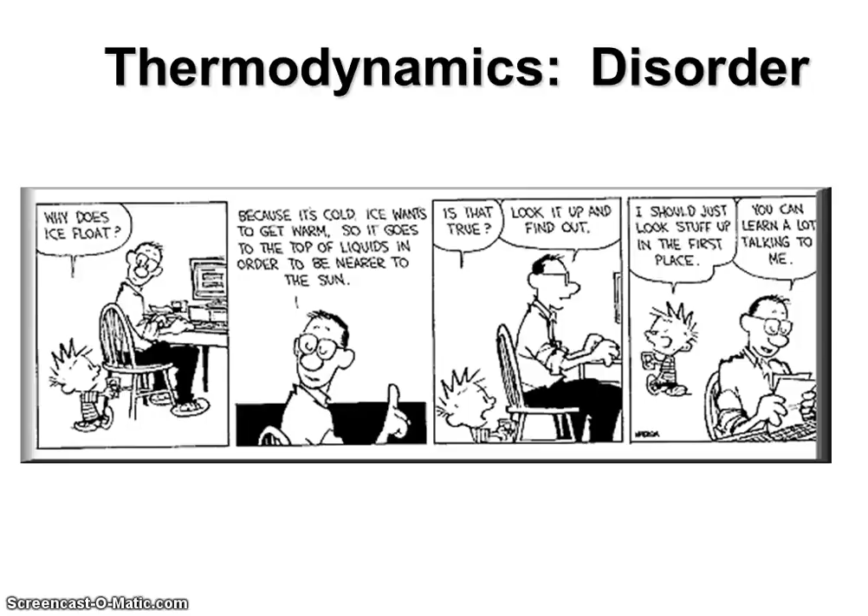Okay, now let's look at the second law of thermodynamics, dealing with entropy. Okay, first of all, I'd like you to make a guess here. Fossil fuel electric generating plants produce thermal pollution. Part of the heat produced by the burning fuel is not converted to electric energy. The reason for this waste is, and you've got five answers here.

A, the efficiency is higher if some heat is allowed to escape. B, engineering technology has not yet reached the point where 100% waste heat recovery is possible. C, some waste heat must be produced; this is a fundamental property of nature when converting heat to useful work. D, the plants rely on fossil fuels, not nuclear fuel, or E, none of the above. So lock in your answer, and let's see if we can figure it out at the end.

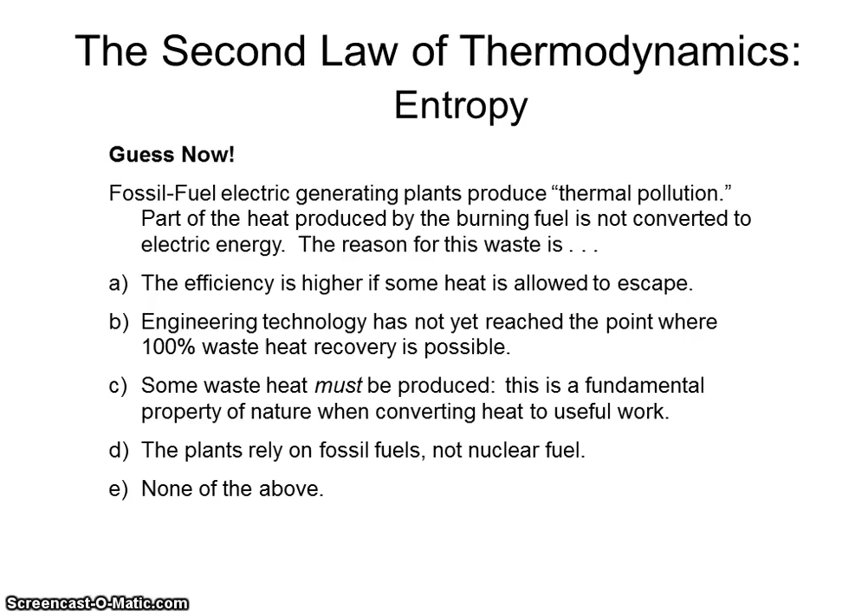Okay, the first law of thermodynamics states that energy is conserved. There are, however, many processes we can imagine that conserve energy, but are not observed to occur in nature. For example, when a hot object touches a cold object, why doesn't the hot object take energy from the cold object, making it hotter and the cold object colder? I mean, that's possible as long as energy is conserved, right? So the one with the low energy gives up even more of its energy to the hotter object, but the total amount of energy would be the same.

That never happens. So here we have this horseshoe that's hot. We put it in the water. What do we do that for? Well, it cools down the horseshoe, right? Well, why? Why doesn't it go in reverse? Why doesn't the hot horseshoe inside this cold bucket of water gain even more energy from the cold water, make the water turn to ice and make the horseshoe even hotter?

Here's another example of that first law. When you drop a mug, its potential energy is converted into kinetic energy, which is then converted into internal energy as the mug shatters and comes to rest on the ground. Have you ever seen it go in reverse? In other words, the shattered mug all of a sudden reassemble itself and go back up into the air to wherever it fell off of. Why not? I mean, the energy is still conserved. Why doesn't it happen?

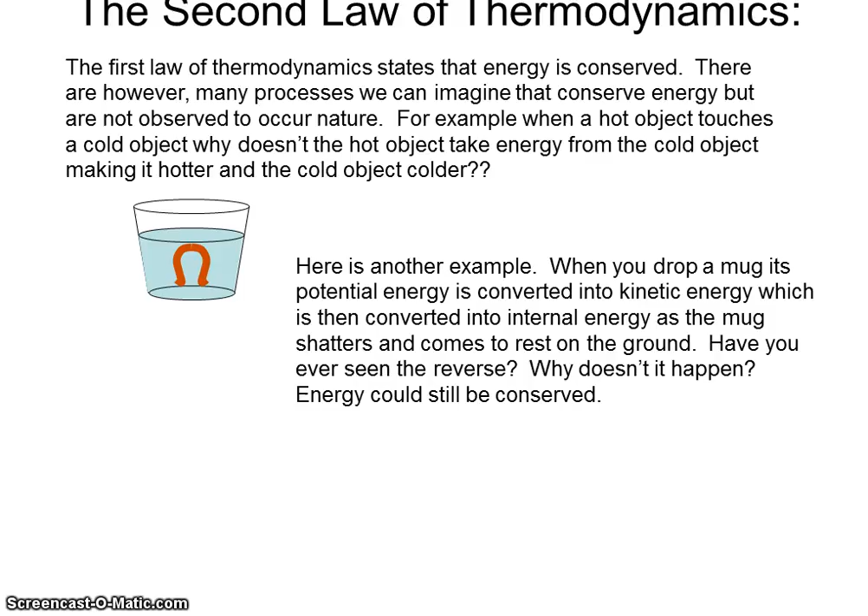Hmm. Well, that's because of the second law of thermodynamics. The second law of thermodynamics is a statement about which processes occur in nature and which do not. Heat can flow spontaneously from a hot object to a cold object. Heat will not flow spontaneously from a cold object to a hot object. Now let's think about a heat engine.

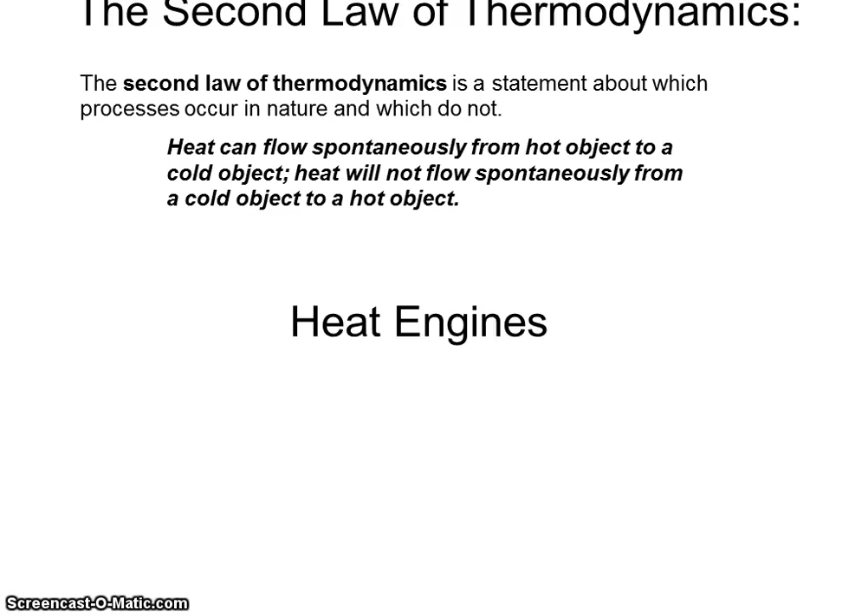This is supposed to be a pictorial example of what a heat engine does. So here we have the engine itself here in green. And what it does is it operates between two reservoirs of temperature. This reservoir here is a high temperature reservoir, and here's a low temperature reservoir. And what it does is it takes energy in the form of heat from the high temperature reservoir and it converts some of that into useful work. But here's the deal, not all of it gets converted into useful work. Some of it is always exhausted out the exhaust into the low temperature reservoir.

So if you're thinking about your car, you've got the high temperature inside your engine, and some of that is turned into useful work to make the tires spin so you could drive somewhere, but some of it goes right out the exhaust or radiates from the radiator into the environment around the car.

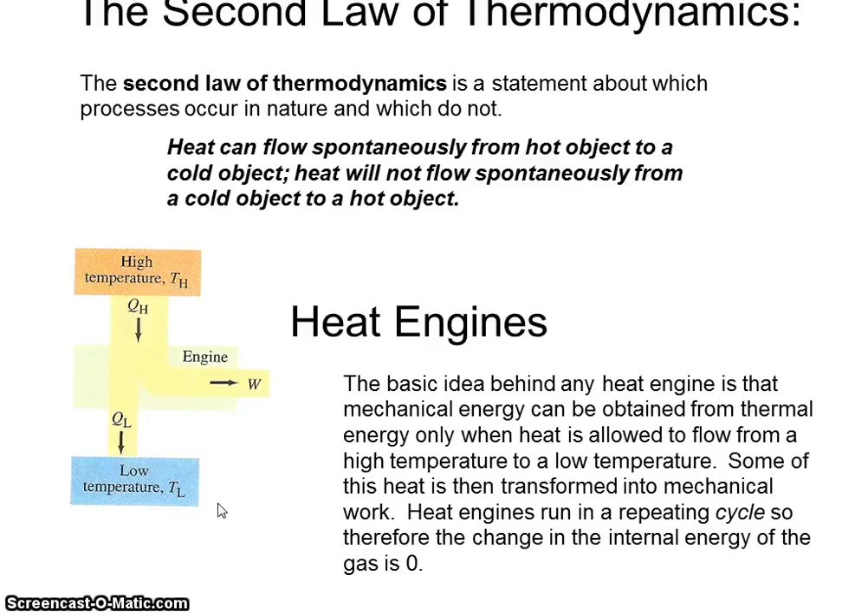The basic idea behind any heat engine is that mechanical energy can be obtained from thermal energy only when heat is allowed to flow from high temperature to low temperature. Some of this heat is then transformed into mechanical work. Heat engines run in a repeating cycle, so therefore the change in internal energy of the gas is zero. Heat engines: why a change in temperature is needed to drive a heat engine.

In the reciprocating steam engine shown below, suppose there were no condenser or pump and that the steam was at the same temperature throughout the system. Thus, although work would be done by the gas on the piston when it expanded, an equal amount of work would have to be done by the piston to force the steam out the exhaust. Well, if that happened, there would be no net work done. For a real engine, the exhaust is cooler, so the exhaust pressure is less than the intake pressure. In that case, there would be net work done.

If I wanted to figure out the efficiency of my engine, really we want to look at the heat that goes in and the heat that goes out and how much useful work. So the efficiency, I'm going to call it E, of any heat engine can be defined as the ratio of the work it does, W, to the heat input at the high temperature, QH. So one way to find the efficiency would be work divided by QH. Now, of course, that's going to be a decimal. Then you can multiply by 100 to figure out that efficiency, percent.

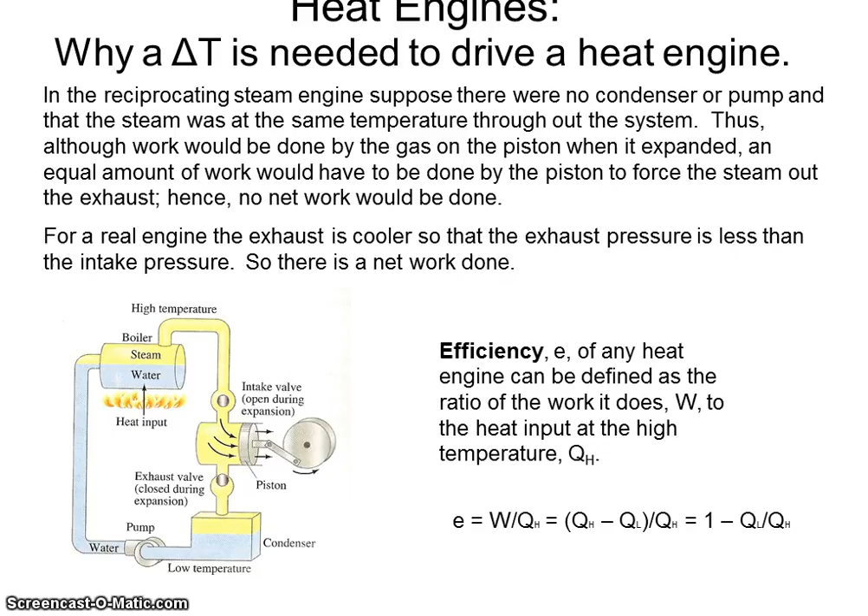Another way to do it, since work is really going to be the leftovers between QH and QL. H again is the high temperature reservoir, QL is the low temperature reservoir, and that's the heat in and heat out. You can think of it that way. Another way you can find it would be QH minus QL, that quantity over QH. Or you could also divide by QH and you get 1 minus QL over QH. Heat engine efficiency can be defined as the ratio of the work it does, W, to the heat input at the high temperature reservoir.

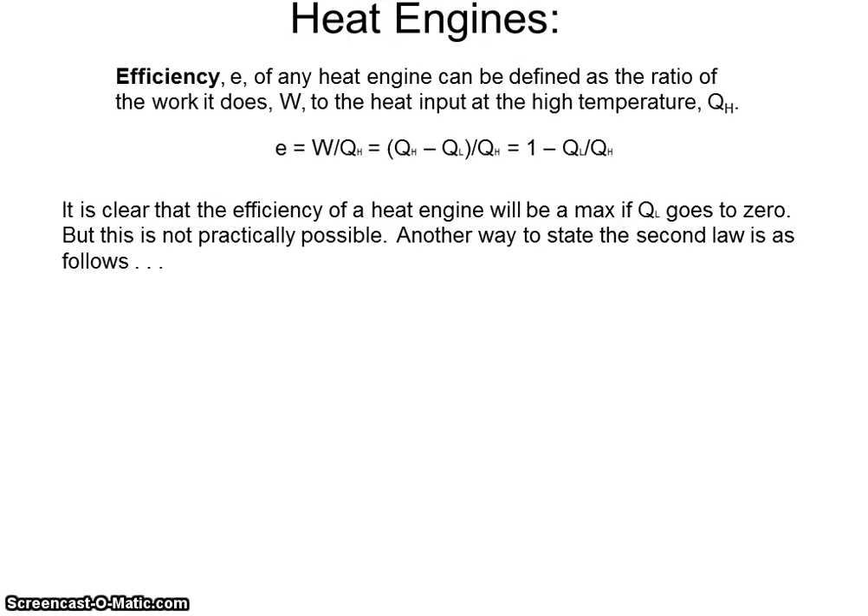It is clear that the efficiency of a heat engine will be a max if QL goes to 0. And I think you can see that. If QL would go to 0, that means you'd have a 100% efficient engine. But that's not practically possible. It can't happen in nature. The second law of thermodynamics says it's not possible. No device is possible whose sole effect is to transform a given amount of heat completely into work.

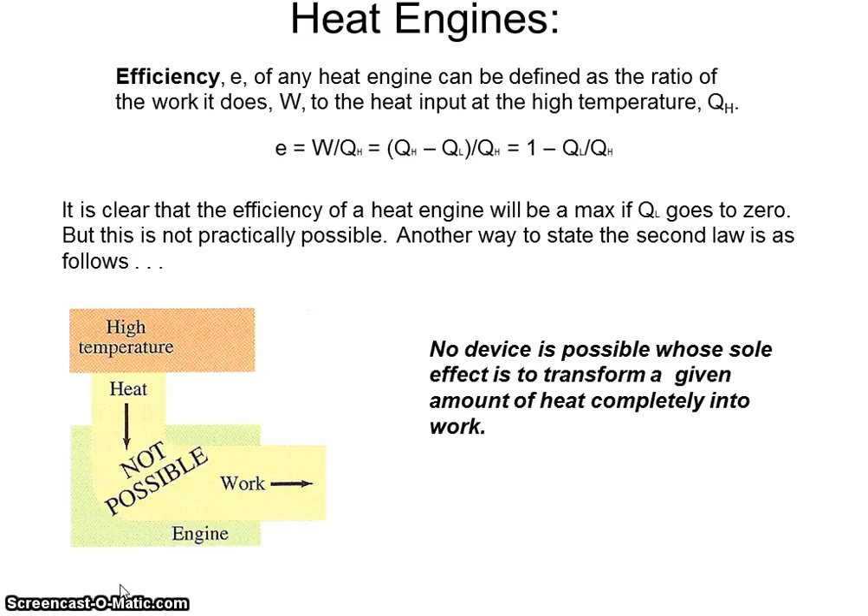So another way we would find efficiency, E, is an ideal efficiency. Sometimes it's called the Carnot heat engine efficiency. And that's actually related to the absolute temperatures of the low temperature reservoir and the high temperature reservoir. So we can totally bypass the heat, Q, and actually go right into absolute temperatures. So the ideal efficiency would be 1 minus TL over TH.

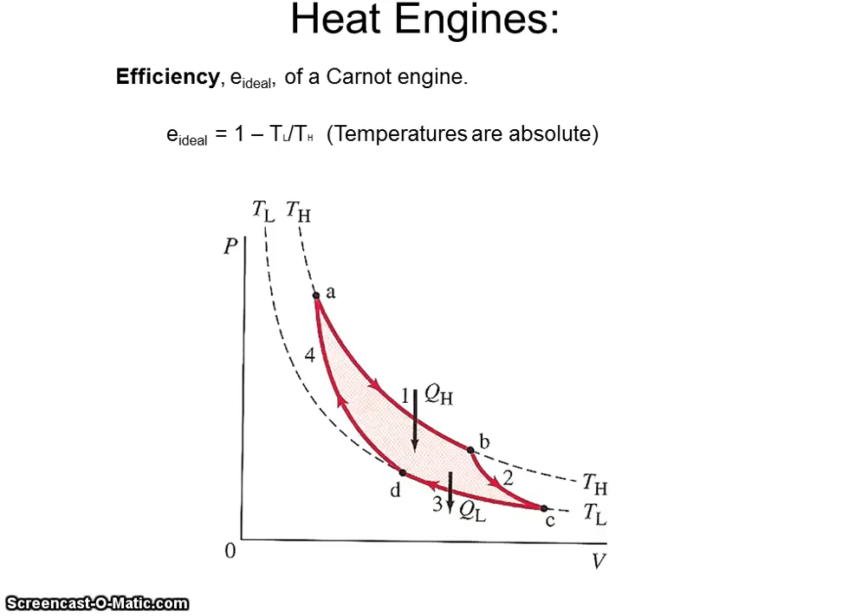Again, you can see that the maximum efficiency would be when TL goes to 0. Well, that would be a temperature of 0 Kelvin, absolute 0. It's not possible to ever reach absolute 0. We've gotten close, much closer than what nature has gotten, millionths of a degree away from absolute 0, but it's not possible to reach absolute 0.

Thus far, we have stated the second law of thermodynamics for specific situations. What we really need is a general statement. The total entropy of any system plus that of its environment increases as a result of any natural process. Biological evolution. Sometimes people point out biological evolution kind of violates this second law of thermodynamics. In actuality, it does not.

An interesting example of an increase in entropy relates to biological evolution and to growth of organisms. Life forms are highly ordered systems, so at first glance it might look like the total entropy is decreased. Does evolution of such a system violate the second law? Some people say it does. But it doesn't, because even though that life form is highly ordered, if you added up all the waste products that organism has produced, the total entropy of the system, including the waste products, will have increased.

So the second law doesn't say you can't have a decrease in entropy in one isolated location, but for the entire system, the entropy will have to increase. So let's go back to your guess. Do you remember which one you guessed? What's the right answer? Right answer is C. Some waste heat must be produced. This is the fundamental property of nature when converting heat to useful work. You can't have a 100% efficient heat engine.

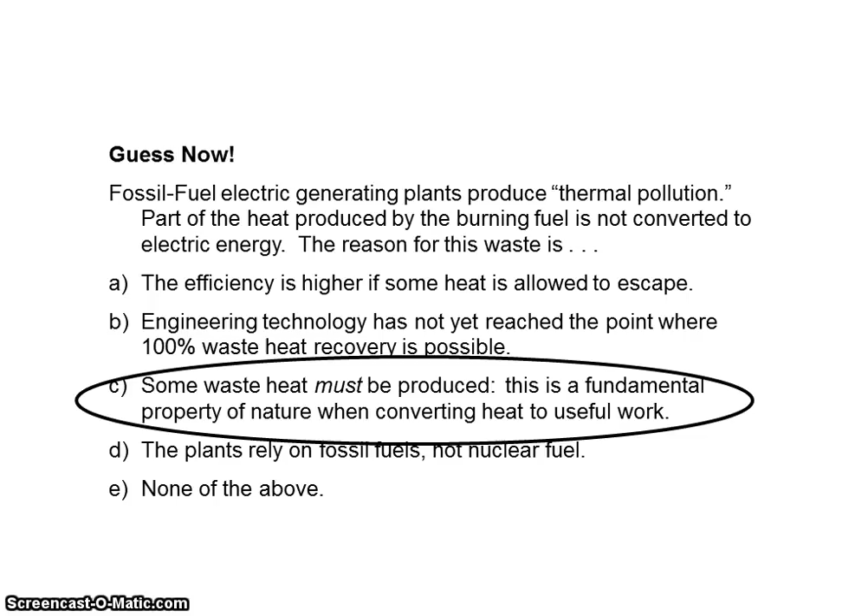In fact, you might like to know that your cars, if they're just completely gas, not electric, not hybrid or anything, the most efficient they could be would be, I think, around 20%. And that would really be a diesel, which has much higher engine temperatures than a typical car does.